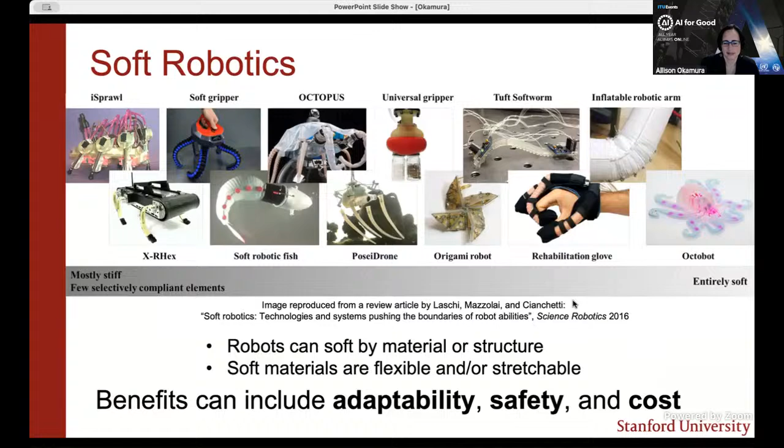And what can be, but not always true, is that soft robots can be less expensive than some traditional systems. They can be manufactured or fabricated, often without a fancy infrastructure, and this can actually make them more accessible to different communities. There's so many different types of soft robots. So I think a way to guide you through some possibilities in the field is to give a few examples from my own research lab. So I'm going to talk a little bit in the beginning about patient-specific medical robots, which was my foray into this field.

Spend a lot of time talking about robots that grow by tip eversion, also known as vine robots, and then end with some examples of soft wearable haptic devices to really spark your imagination about how these robots interact with the human body. Now, in many of these scenarios, the field of soft robotics is based on a long history of work in continuum robots.

So these are robots that aren't consisting of discrete joints and rigid links, but rather robots that have near infinite degrees of freedom. And a lot of these early robots were not really termed soft robots, but now they're recognized as such. And some of the challenges in making these soft robots function well is getting the right materials, having them be able to achieve these sort of continuum shapes, but still be able to apply strong forces to the environment. Because of course, a goal of robotics is to apply forces to the world in order to do good. And so if the robot is too soft, then it can't actually interact with the environment in a useful way.

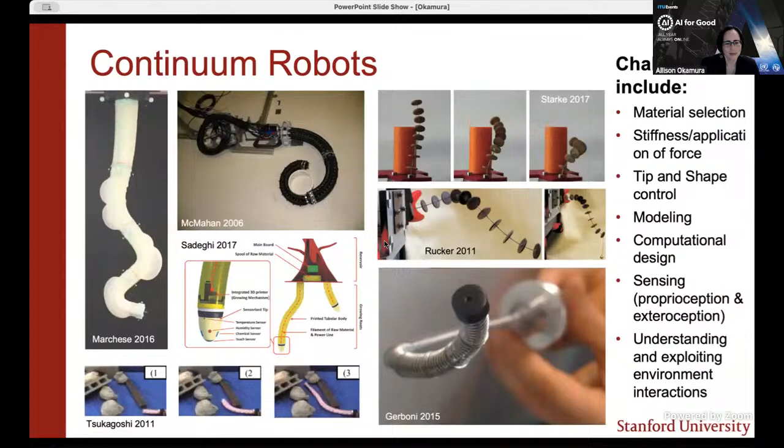We have to be able to control the tip of the robot as well as its overall body shape. And then there are some technical challenges related to how do you model them? How do you design them and optimize those designs? How do you integrate sensors? And overall, in order to do a task in the world, you have to understand how to exploit the environmental interactions. So these are examples of a number of concepts behind continuum robots.

And I think it's also important to note that many of these soft robots are based on biological inspiration. And since several of the systems that I'll describe to you today are built on the concept of growth, I thought I'd give some bio-inspired ideas that are related to growth. So pollen tubes, for example, grow over time, of course, relatively slowly. Nerve cells in animals also grow.

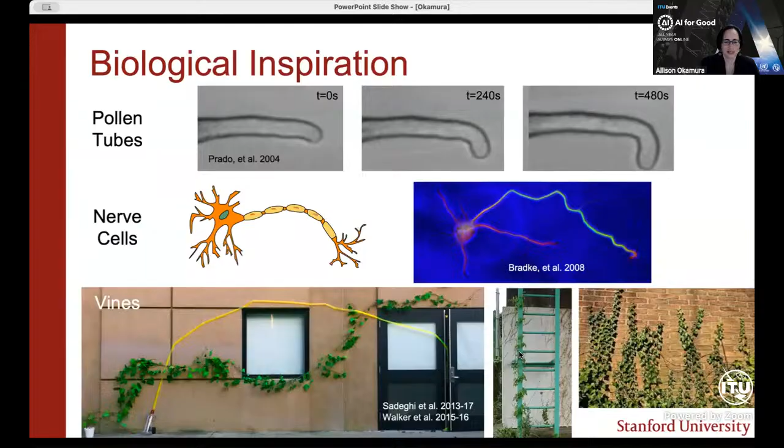And I mentioned one of our robots is called the vine robot, and that's inspired by the growth of vines, which can not only access places that are difficult for humans to go, but also stay in place in situ for long periods of time, which could have advantages. So biological inspiration for growth has driven a number of the projects I'll talk about.

So the first project I'd like to highlight is related to medical robotics. So when you think about robotics that help people, I think medical robotics often come first to mind. And the idea behind soft robots here is being able to create structures that can go into the body in the least invasive fashion possible.

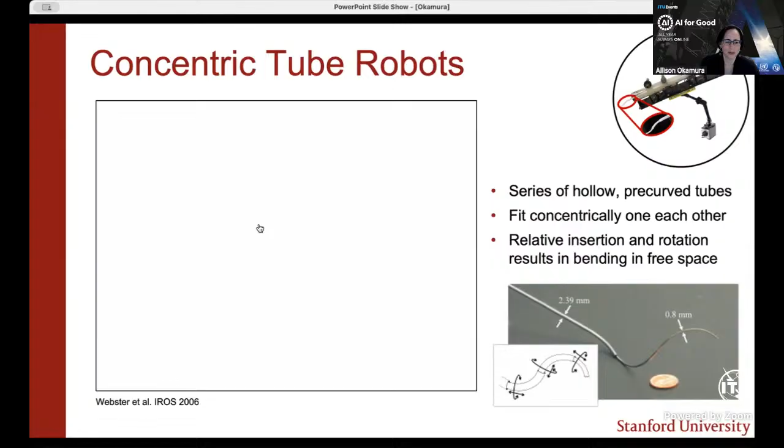So in this example, which is concentric tube robots, which I'd say we developed before I think the term soft robotics was really even thought of as a subfield, the idea is that we used semi-soft materials, in this case nitinol, which we use for its super elastic properties, and we make them into pre-shaped tubes. And those pre-shaped tubes, if you insert and spin them relative to each other, result in changing shapes and this sort of tentacle-like behavior.

And the reason why this is so useful for medical robotics is that unlike robots that have to have transmission through cables or even motors placed right at joints, all of the actuation, the motors can be outside the body, allowing for this very tiny entry into the body. You can see that the tip here is only 0.8 millimeters.

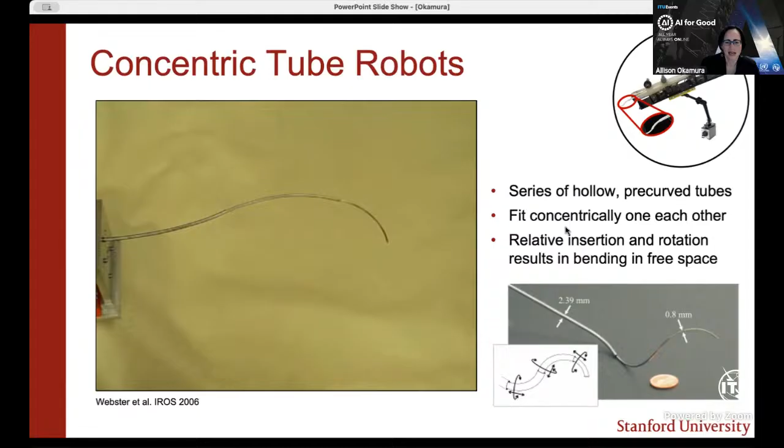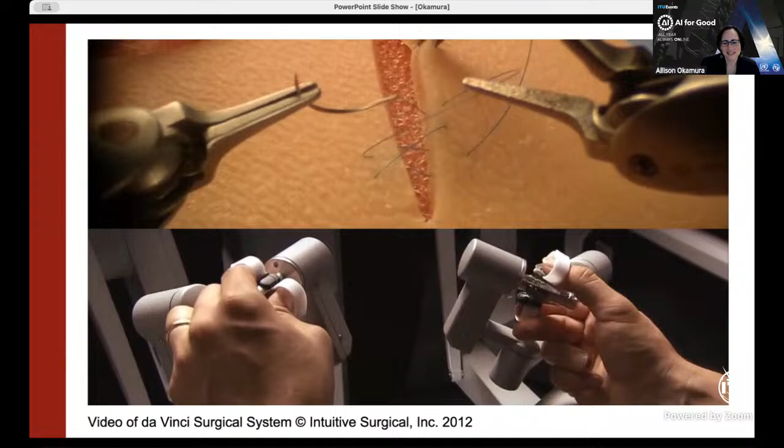Now, in contrast, let me give you an example of what is used currently in surgery today. And by the way, if you're the squeamish type, this is all artificial tissue. That is rubber and foam, not actual tissues. And this is a really amazing robot, the Da Vinci surgical system, which is a teleoperated surgical robot. And it does have lots of advantages.

You have a human operator, as shown at the bottom, manipulating these fancy joysticks. And then the robot on the patient side, which is shown at the top of the split screen, is following the movements of the surgeon's hands through a teleoperation control loop. Now, the patient side robot that you see in this case at the top of the split screen is magnified almost 10 times over what you see in the lower screen. So by teleoperating the surgical robot, it shrinks the surgeon down and makes them more effective.

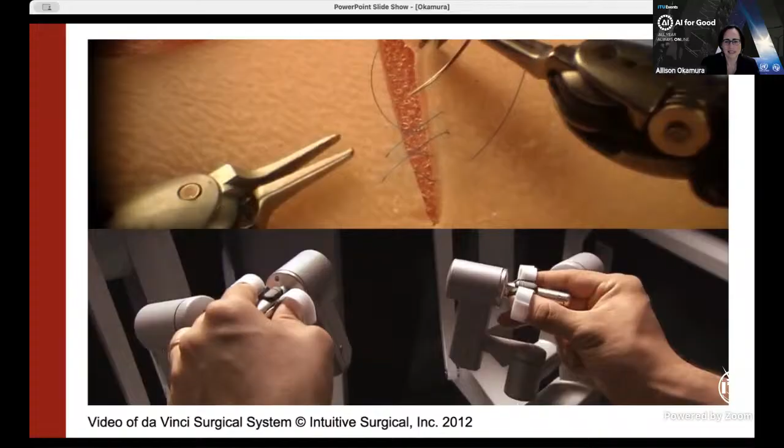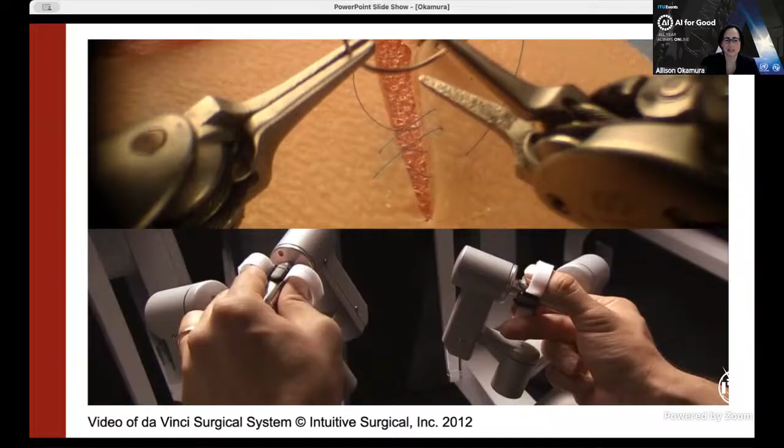However, one of the challenges is that these instruments are long and thin, and the ones that are mostly clinically available today are very rigid. And that means you can't actually access everywhere you would want to in the body. So the idea behind using these concentric tube robots is they can be skinnier, therefore have less invasive access. And instead of also being straight with a wrist at the tip, like you saw in the previous video, the whole robot shape can curve.

And this is some example work that was done by my former PhD student, Tania Morimoto, who is now on the faculty at UC San Diego. And it shows an example of how we can design patient-specific robots that are just right for a particular person. So we begin with CT scans of a particular patient, in this case a pediatric patient whose body is relatively small compared to an adult.

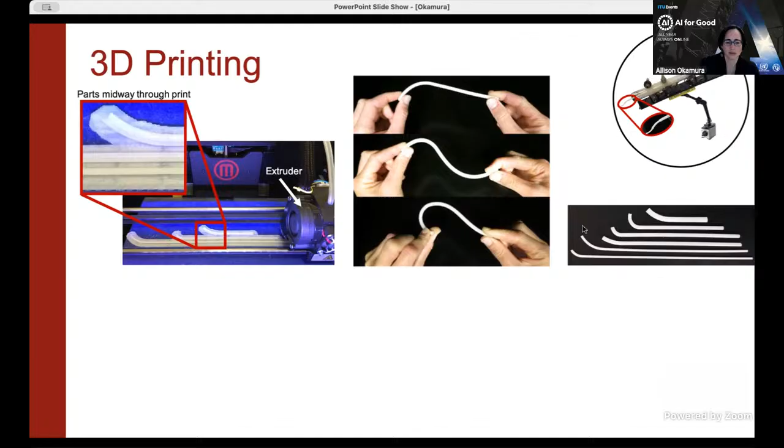So here's a very simple example of printing some relatively flexible tubes in order to create one of these concentric tube robots to go inside the human body. And you can also even make the drive mechanisms themselves more compact by integrating novel gear mechanisms and be able to create a lightweight system that you can place on another robot or even hold in the human hand in order to provide this minimally invasive access.

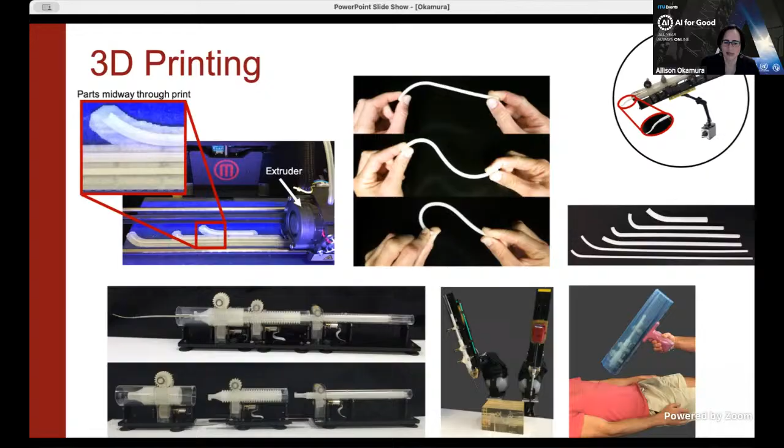So I mentioned before that these robots grow in a way, and they do. They telescope in and out, and that allows you to get this minimally invasive access, right? To get deep into the body without having to slide the whole instrument inside. We don't have new material come from the tip, and in this method, we use this telescoping method. But there is another way to grow, and that is of the form that we use in our Vine robots.

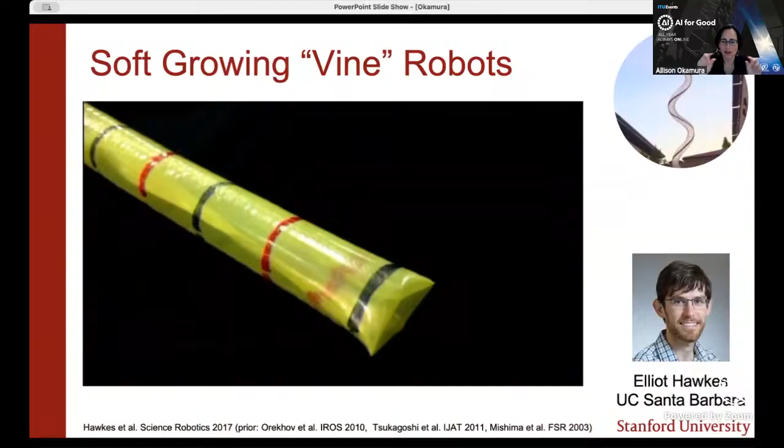The idea here with this very different type of robot, which still has this long, skinny form factor, is that we have a membrane. It could be fabric, it could be plastic, as shown here. And as you create it into a tube, you can also flip that tube inside such that you have more material on the inside. And then when you apply pressure to it, the tip turns inside out, also known as eversion, and that allows it to grow.

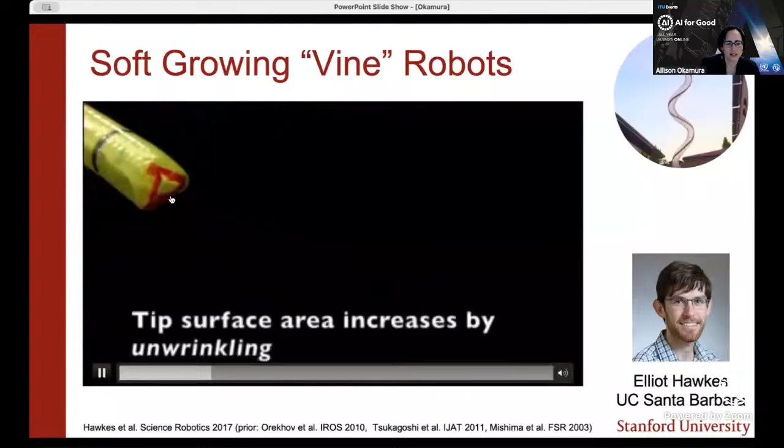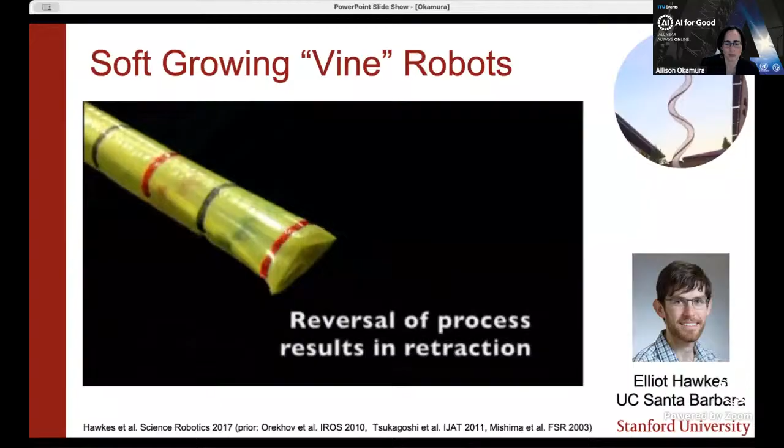And so this video here just shows a close-up of what it looks like at the tip, showing that new material comes from the tip and turns inside out, unwrinkling and causing growth. And then that process can be reversed in order to retract the robot as well. And a lot of the work I mentioned here was spearheaded by Elliot Hawkes, former postdoc who's now at UC Santa Barbara. And I'm going to spend the majority of this talk discussing these Vine robots because there are so many interesting applications for these robots that are relevant to UN Sustainable Goals.

So let's look at what this type of robot can do and what is its basic structure. So one of the great things about this type of system is that when you use pneumatics, you can use air, which is a readily accessible filler material, in order to make the robot extremely long.

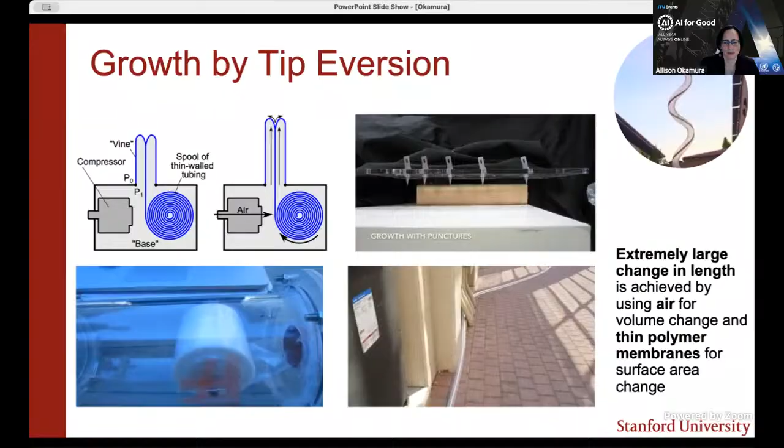And so in this case, we have a spool of simply LDPE tubing, so that's low density polyethylene tubing, similar to the kind your materials are packaged in when you purchase something, and that makes a very compact base. And then when you take that tube out and you flip it inside out and you fix it, you have this closed air in this light gray area here, and then you can have a compressor or other type of pump and apply air inside, and then the air itself pushes the robot to extend its length and to evert.

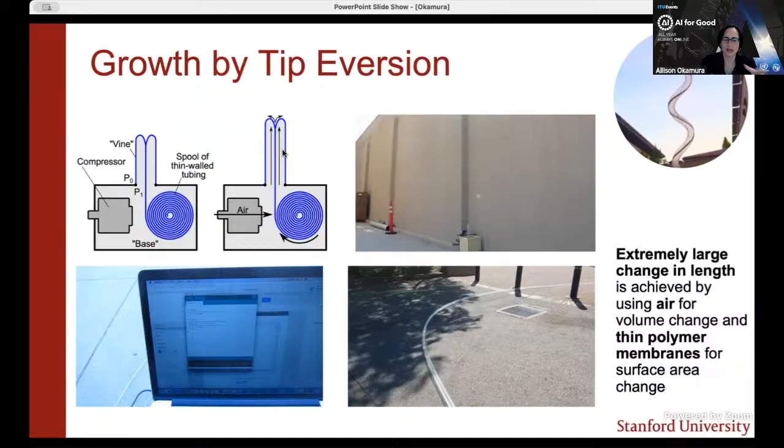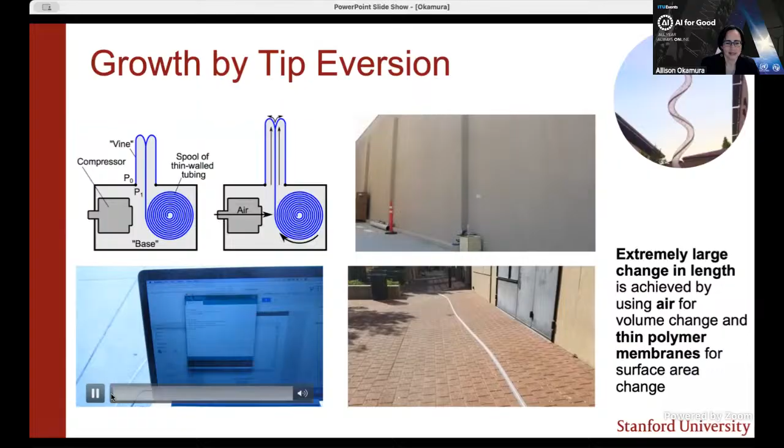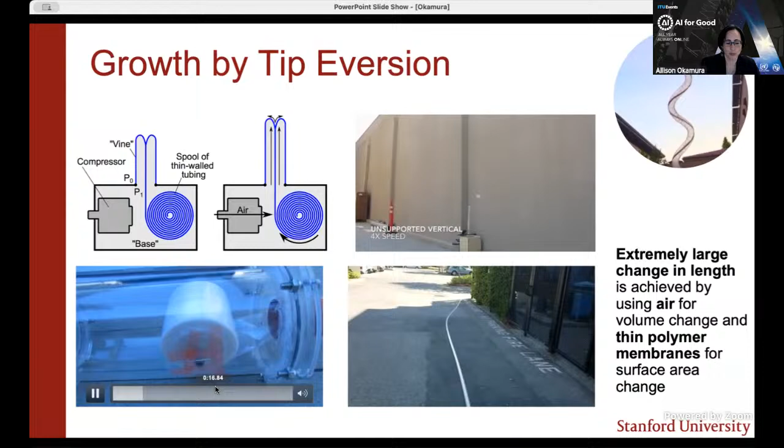And it's important here that the material be flexible, that is, it can bend, but it can't be stretchable, because if it was too stretchable, then it would expand in diameter rather than extending its length and everting. And so in these examples here, I'm just going to go back so I can restart the videos. We see an example of a relatively small spool of tube you can see on the lower left. And when that tube is expanded, it grows about the length of a football field.

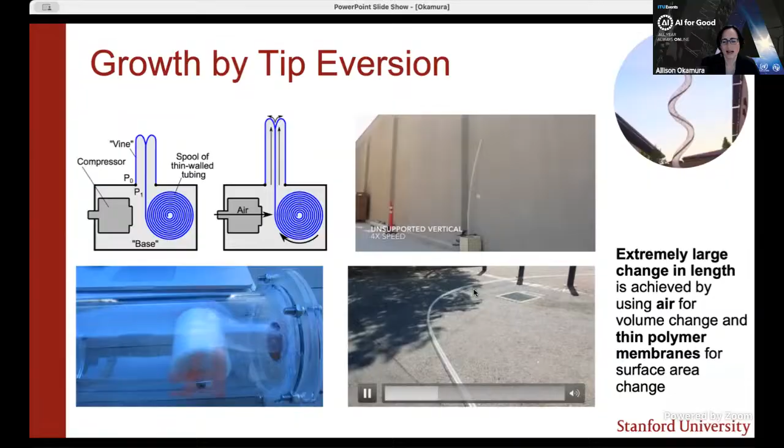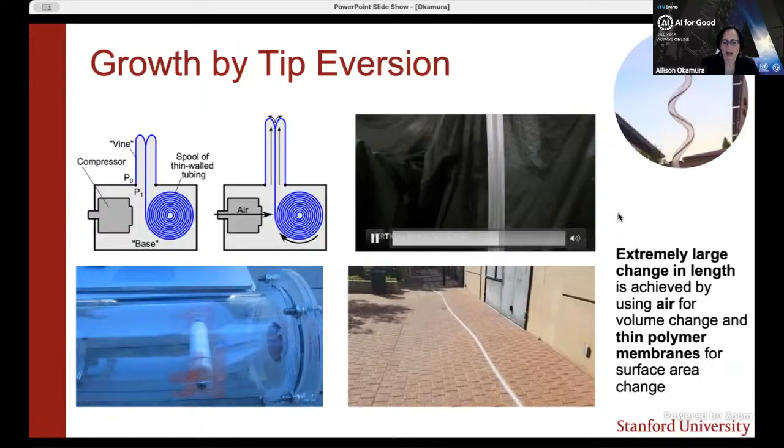And in this case, we're not actually actively steering it. We just grew it and it sort of bounced off of its environment. And you can see you can also grow against gravity if desired. So you can get this very large change in length and explore in locations where you couldn't do it otherwise. But if you're just growing in length, it's hard to say, is that exactly a robot? What is your definition of robot?

For most people, a robot would be a mechanism that can also autonomously respond based on sensing and reaction to something that's happening in the environment. So we would like the robot to actually steer and change its direction based on things it senses in the environment. And I'll play this to restart the videos. So on the upper left is an entirely autonomous Vine robot that is using a camera that's being pushed forward at the tip in order to seek out light and change its shape in order to achieve a particular configuration.

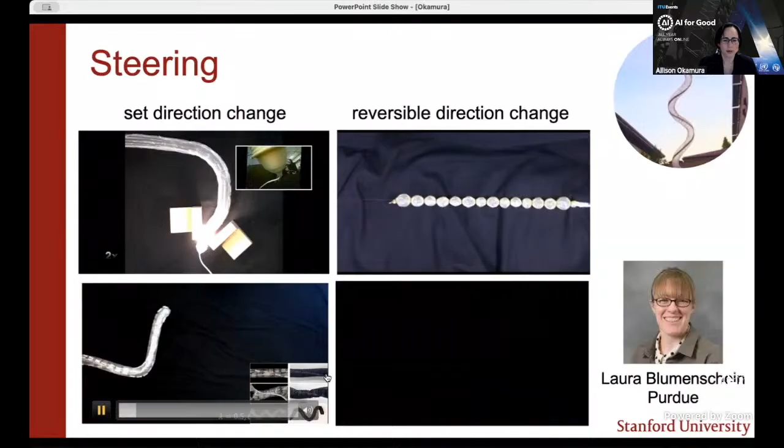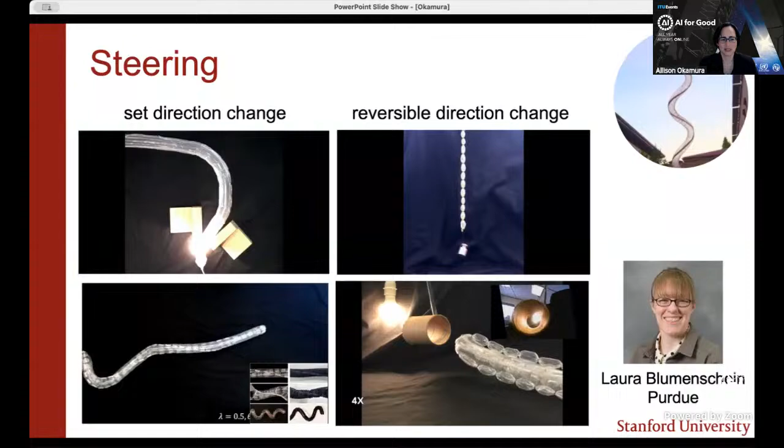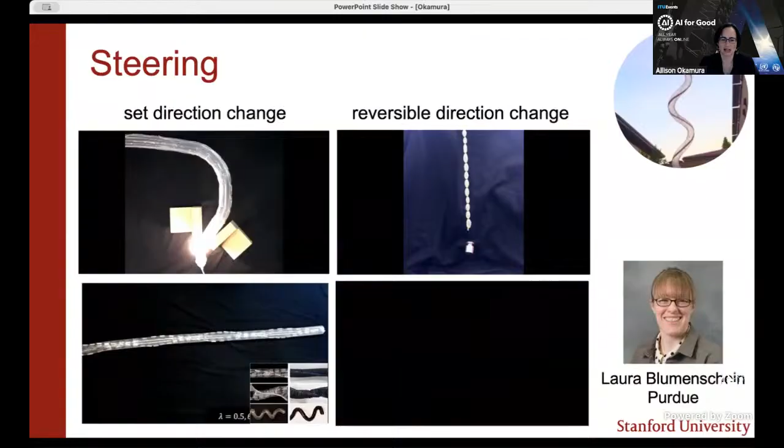And then some of the other videos here just show other ways in which you can change the shape by pulling on tendons or creating pneumatic tendons. And an important note is that you might have to make a decision about designing a robot that's relatively compact, that has simple actuation such that it can achieve just a particular set of discrete shapes, versus this reversible direction change shown in the videos on the right, where it can say turn left, turn right, and then decide which direction to grow in. So steering is very important to make this eversion principle into something that actually resembles an autonomous robotic activity.

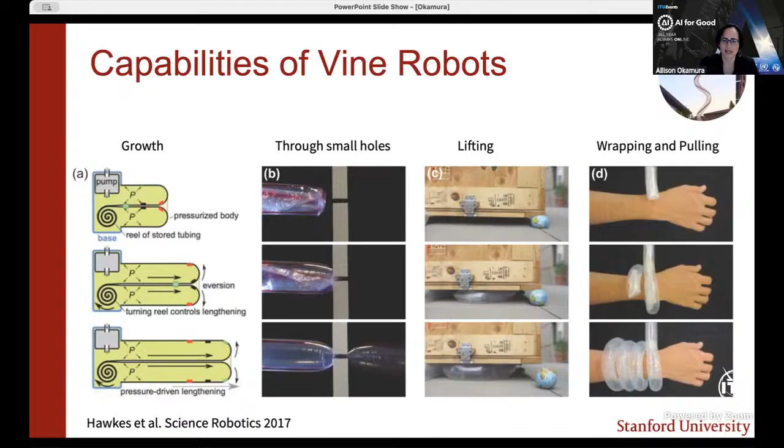So these properties, the growth plus the steering, allows you to do some pretty cool things. You can go through small holes, you can grow under objects in very small areas and then expand radially in order to lift a heavy weight, as shown here. And you can also wrap around things in the environment and even pull on them. And so you can think of it sort of like a very smart rope. It's not exactly a snake because a snake has to push off of the environment in order to move forward. But in this case, the robot is moved forward by internal propulsion, so it actually doesn't rely on contact with the environment in order to do its task.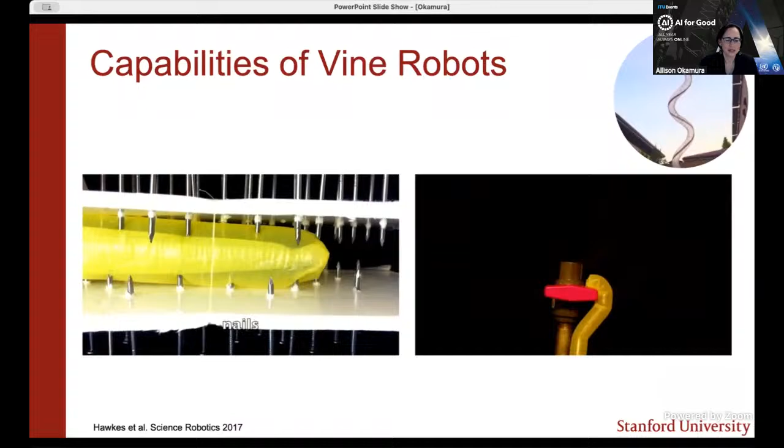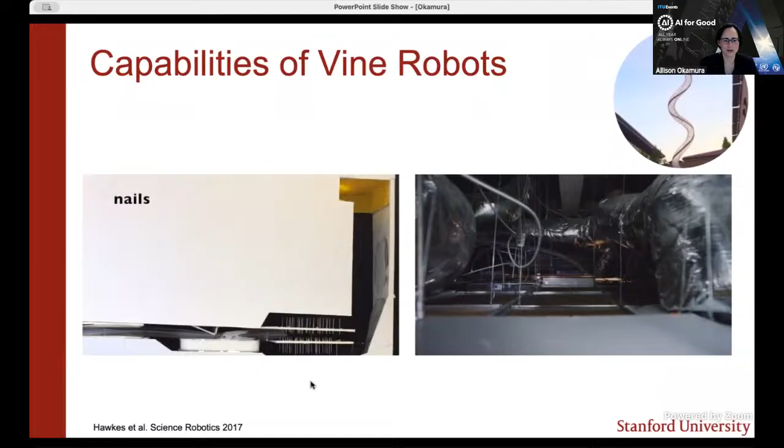So I'll show a few more videos here of capabilities of Vine robots, and then we'll get into some various applications in different scenarios in which we've used these, and hopefully this will spark your imagination about what soft robots can do for humanity. So on the left, we have some close-ups of going through some difficult surfaces, including a bath of white glue, going through nails that actually poke into it a little bit, to going through sticky fly paper, and then delivering a sensor through the middle of its body.

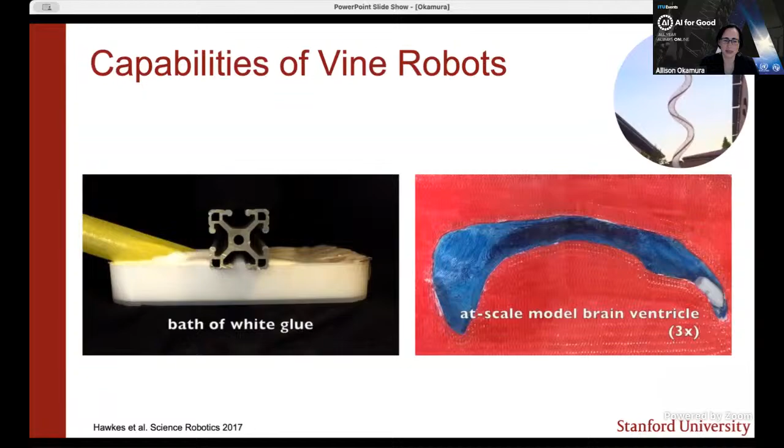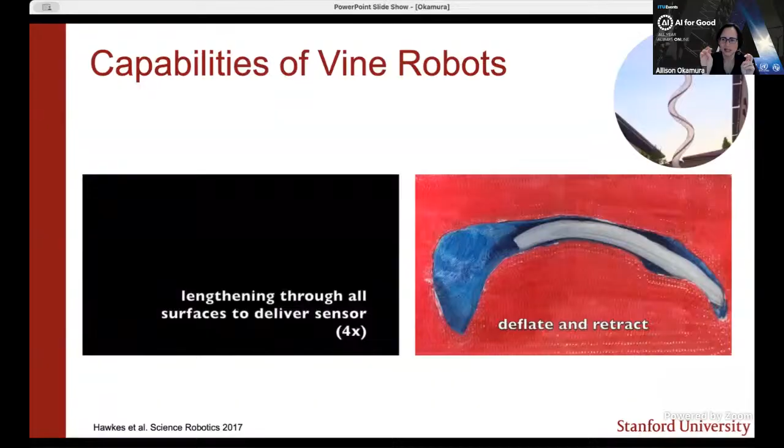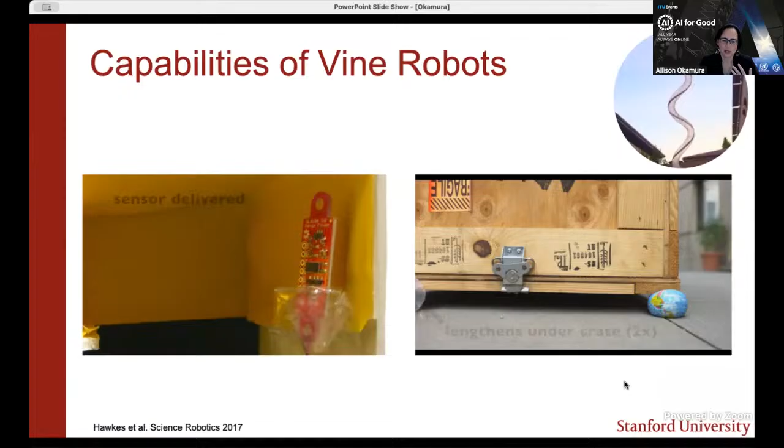And this system, which I'll play again on the left, is doing things that it would be almost impossible to imagine any kind of traditional robot being able to do. And because new material is coming from the inside and flipping inside out at the tip, it means that you always have fresh material coming through the tip and you're not dragging any detritus from the environment through it. And on the right, we show concepts that are more related to creating useful structures. This is the example of growing under a crate and then being able to act as a pneumatic jack.

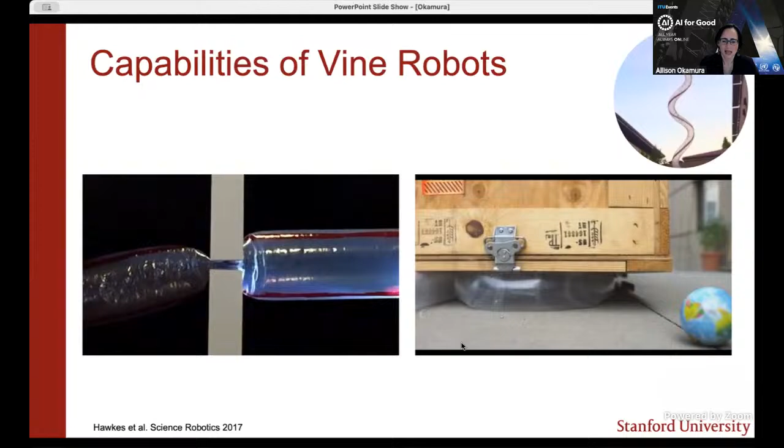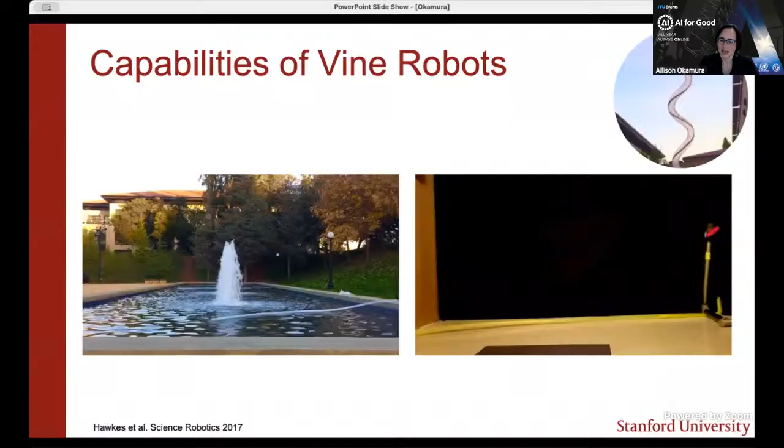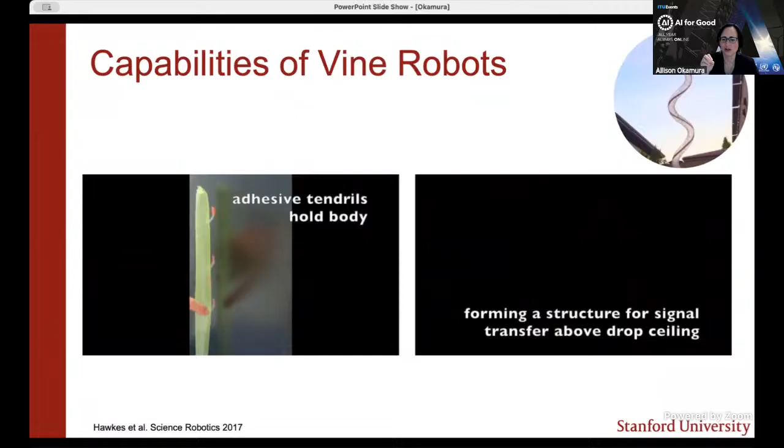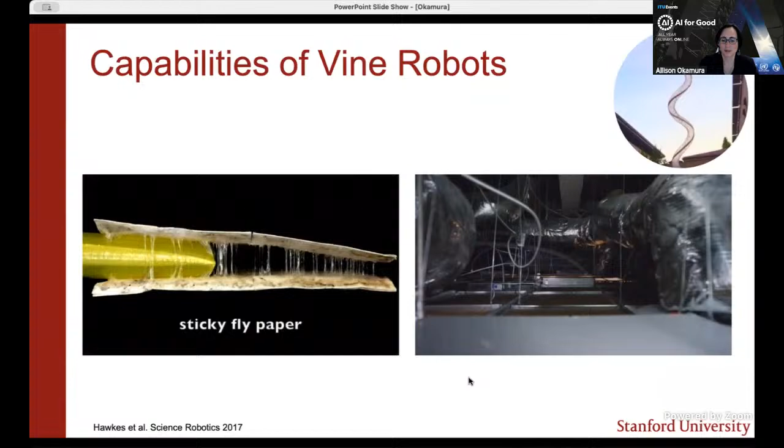I'm going to go back to the beginning again so that we can look at how a robot like this can go under a door and reach a valve and then actually hook onto it, and then you'll see it pull to effectively turn the valve. So it has very limited manipulation capabilities, but if you use the structure in a smart way, you can preform the robot and also pull on it in order to get access and perform some unexpected tasks in scenarios that would keep humans safe and maybe away from a dangerous situation.

Let me just also, for the rest of this section of the talk, really highlight robots being used in some interesting scenarios. And the first one I'm going to show here was spearheaded by a former PhD student, Margaret Coad, who's on the faculty at Notre Dame. And she took our Vine robot, a special version that she designed, to Peru in order to use it at an archaeological site with a faculty member who was studying the history of Chavín in this region of Peru.

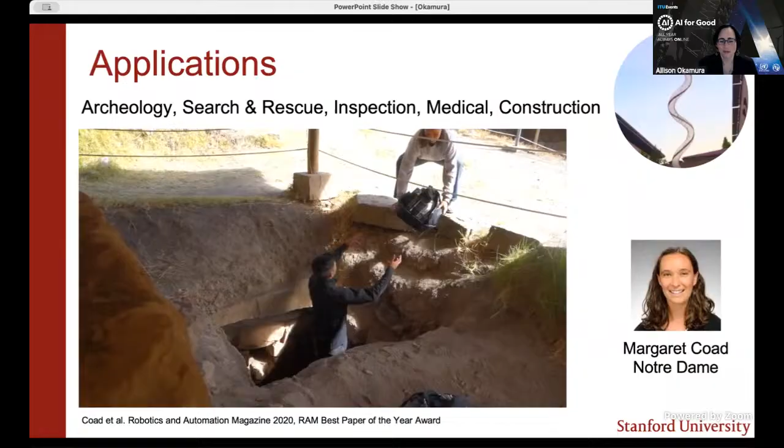So there's Professor Coad with her Vine robot, which, unlike many robots, has really been designed to go outdoors, to work in rough environments, and deliver camera and vision into places where you can't normally see. And these are environments where it would be quite dangerous for a human to enter. And so Margaret was able to see things that wouldn't be able to be viewed in any other way. So archaeology is a really interesting example, and you can start to imagine the robot going into all sorts of difficult places that humans couldn't go otherwise.

And one example that we've done in this vein has been working with conservation biologists and ecologists at Stanford who are interested in studying endangered animals. And in particular, at Stanford, we have a creature called the California tiger salamander. And this is a very cute animal that lives in the burrows that have been abandoned by California ground squirrels, actually. But they are endangered, and depending on the weather and the climate, they can also be a kind of hallmark of how we're doing in terms of protecting our environment.

And so this picture shows some of my graduate students actually putting one of these Vine robots into a tiger salamander burrow, going underground in order to inspect and examine these environments. And because the burrows are tortuous in nature and have these complex paths, putting a GoPro on the end of a stick is not the right way to get in there. And there really isn't any other way to non-destructively monitor these environments.

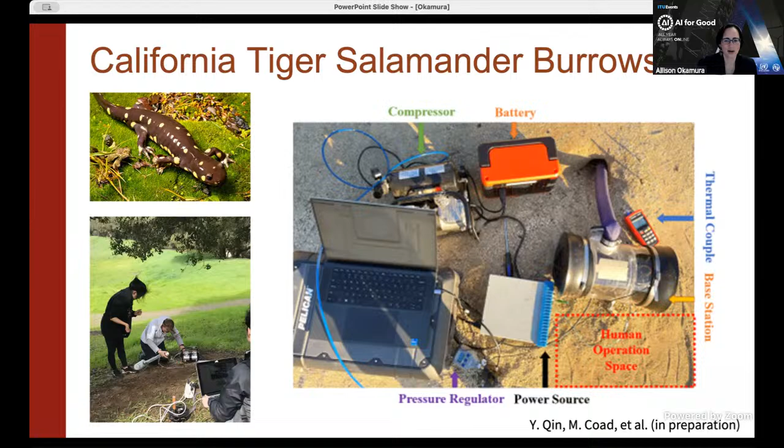So it's interesting, although that project began with an interest in studying the burrows of tiger salamanders, we realized that pipe inspection in general is a really critical task. Throughout the world, we have infrastructure consisting of pipes which provide water, take away sewage and waste, move chemicals around for processing. There's both civil, public, and commercial infrastructure that consists of pipes that in many cases can be very difficult to inspect.

And so we've been working hard to make soft robots that are specifically designed to go inside pipes. Often they need very little steering because the pipe itself constrains the robot, but sometimes you have cases where you have a T-junction or you might get stuck otherwise, and so you can have just a tip mount that steers rather than having to steer the whole body of the robot. And this is a project led by my PhD student, Yimeng Qin, and the idea is that we would like to have better, more sustainable infrastructure by providing this non-invasive or minimally invasive access into the pipes, similar to the way in which other types of robots are minimally invasive devices that can go into the human body.

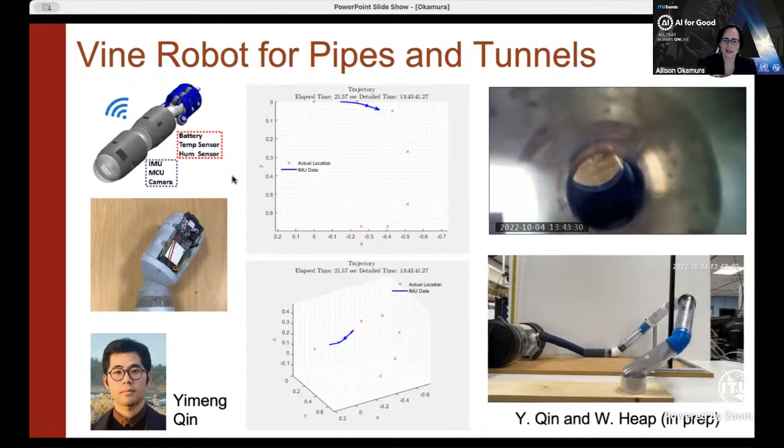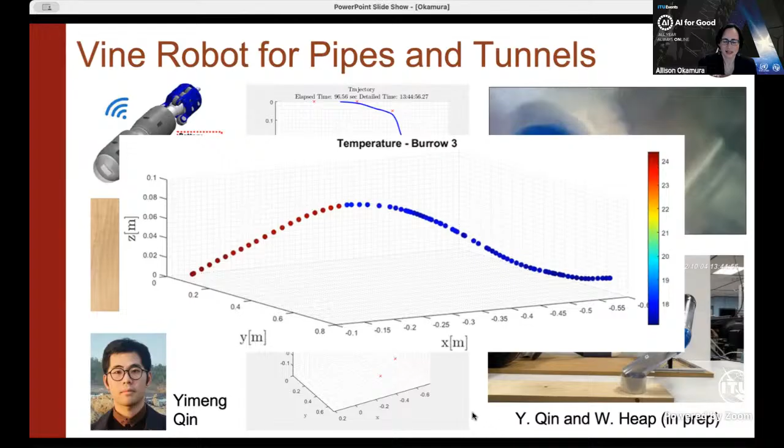And we've even used this type of robot in the tiger salamander burrow. And so one example is as we map the space of a burrow and follow the line, we can do things like measure the temperature here in Celsius as we move around the burrow environment. So it works for pipes that humans make as well as tunnels that animals make. So let's continue along this vein about the importance of being able to do minimally invasive inspection, right? How do we get sensors into locations where you want to keep humans safe and yet still get eyes on what's going on?

And one potential application is nuclear facilities, both the types of pipes that I just talked about, but also just in scenarios that might be in open air in 3D that might have, for example, containers of nuclear material that need to be counted and tracked.

And so we envision that we can do inspections in hazardous environments by having vine robots that have more three-dimensional capabilities and more steerability. So instead of just the whole thing curving, but that you could curve left and curve right and come up with these snake-like shapes.

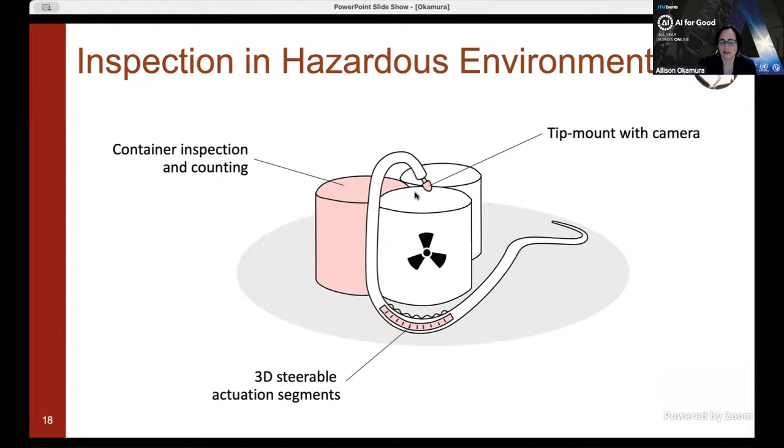So in order to do this, we need 3D steerable segments where we can actuate. We need tip mounts with cameras and eventually manipulators. And we need to be able to observe and track things in the environment.

And much of the work that we had done until a few years ago, we focused on two-dimensional steering, vine robots that went around the ground or maybe very little bit off of the ground. And we've been able to make those very long. But there are a lot of design limitations in doing this. We didn't have true 3D steering. These materials also had limited lifetime due to leakage, and they're very difficult to fabricate.

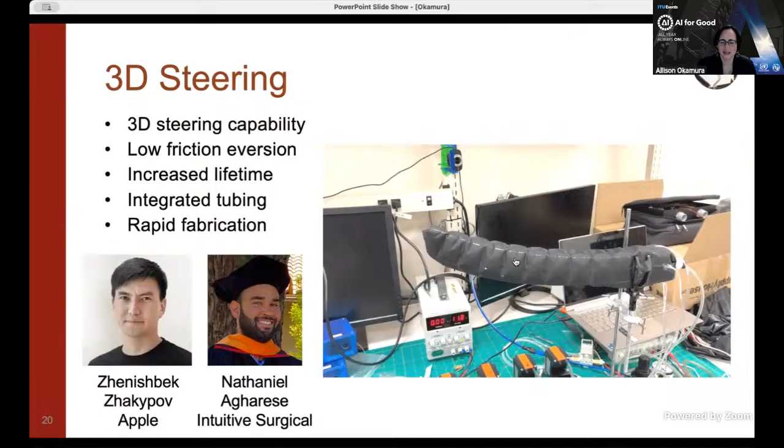So we've been focusing recently on three-dimensional steering, and we've come up with a new fabrication method that's also been observed by other research groups around the world, that we can get 3D steering capability and have more efficient fabrication using a technique that I'll highlight in the coming slides. And this work was led by my former postdoc, Zhenishbek Zhakypov, and my former PhD student, Nathaniel Agharese.

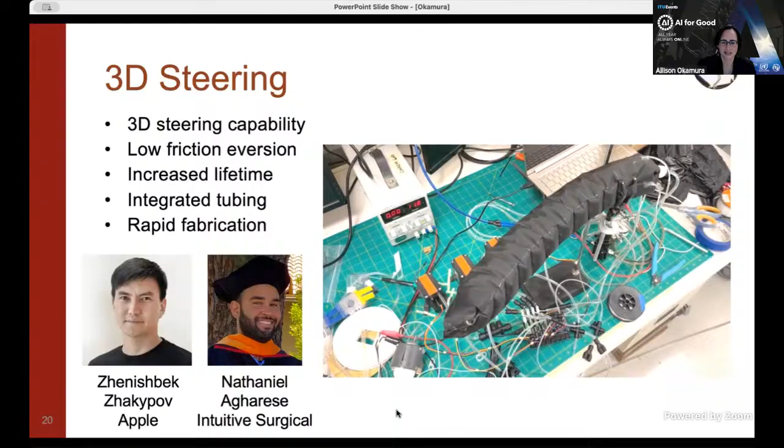So to give you a sense of what it's like to make these vine robots, I showed you a lot of these soft robots, but not really described how you fabricate them. I think this is a nice example of a fabrication technique that really builds on sewing and other methods that already exist in the world. And this is one of the reasons that it could potentially be lower cost to fabricate compared to traditional robots.

So we have this unibody design with segments that are embedded into the main body of the robot. And we do this by taking a fabric material, which has a thermoplastic urethane coating on it. And we create basically a sandwich of two of these materials together, and then we seal it along all of the lines that are shown here. So there are two layers, one right on top of each other, and they're sealed together.

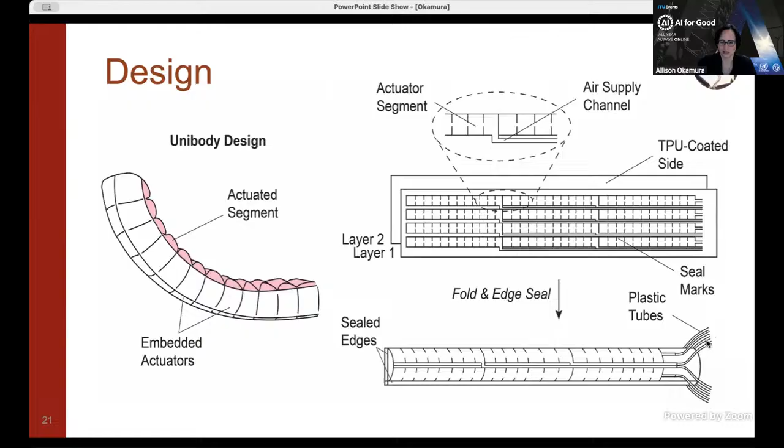We create all of these seal lines, which are shown in all the black lines here. And then we fold them and create a seal edge, and then we add some plastic tubing in order to drive it. And to further show some examples of how this is created, we use a Cricut system in order to basically plot onto it some lines that show where it needs to be sealed. And then the welding actually happens using an ultrasonic welding machine that looks a lot like a sewing machine.

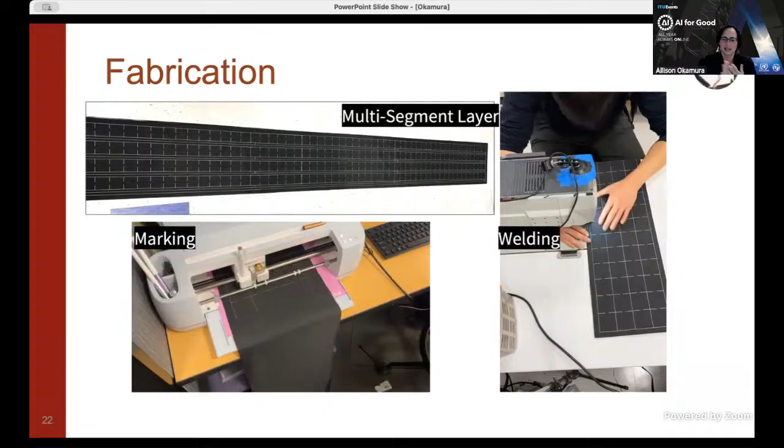And these kinds of processes could definitely be automated to be done at scale, but here's an example of my former postdoc Zenit doing this by hand, and you can see it's a lot like sewing, except you're actually using an ultrasonic welder to attach the materials together.

So what do you get when you've finished creating a system like this? You have a pneumatic control system with a motorized spool, an air supply, embedded tubing, and then steering actuators that let it move in 3D. And while these systems have the potential to operate autonomously, there are a lot of scenarios where you want to have at least a human in the loop for supervision.

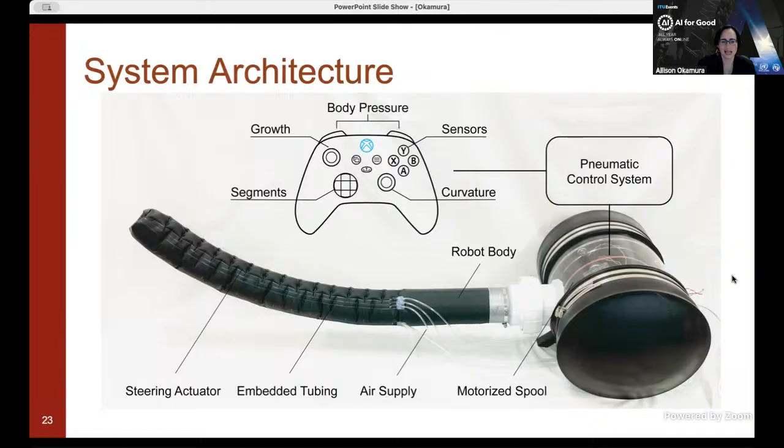So in this case, we had a human in the loop using a game controller in order to steer the robot. So on the left, we see the robot just doing more 2D actions, but let's focus on the video on the right, where we show that the robot can climb up some walls, and you can see actually the video feed in the upper right of the camera.

You can see it going up close to inspect the ceiling tiles in my lab, and then turning downwards a little bit in order to see some pile of boxes here in the upper left. In a second. So now it's steering down to look into locations where a person can't easily see, and then it can even spy on some of our design notes on the whiteboard here.

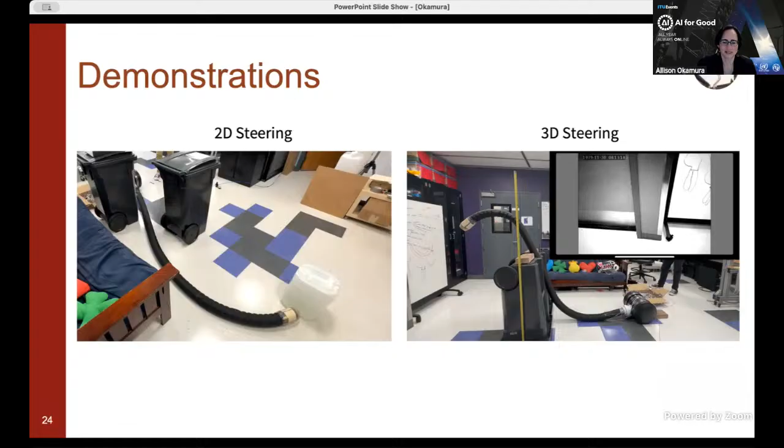So the idea is that these robots can be really used as 3D inspection at a much larger scale than borescopes and some other inspection technologies. And we've even put Vine robots like this many dozens of feet into pipes and place them in environments where there's just no other technology to go. So those were applications that let us become more 3D.

But one of the exciting things is having different types of robots paired together to get to even more difficult to reach places. So one of the things that we'd like to do is make the simplest possible robot that can be flown around by a drone. And to do that, we'd like to minimize the amount of actuation on the body of the robot to make it as lightweight as possible.

So my student Rianna Jitosho, who just graduated and is about to start work at Intuitive Surgical, a medical robotics company that I mentioned earlier that made the Da Vinci robot, she did a project which exploited the dynamics of these Vine robots. So you can have relatively lightweight actuators and use a combination of the movement of a drone and reinforcement learning in order to get the robot to do a particular task.

So this shows some of Rianna's early work, where instead of yet putting this Vine robot on a drone, she just showed with a simple sliding actuator that a Vine robot hanging down could be used to reach different targets and be used with reinforcement learning.

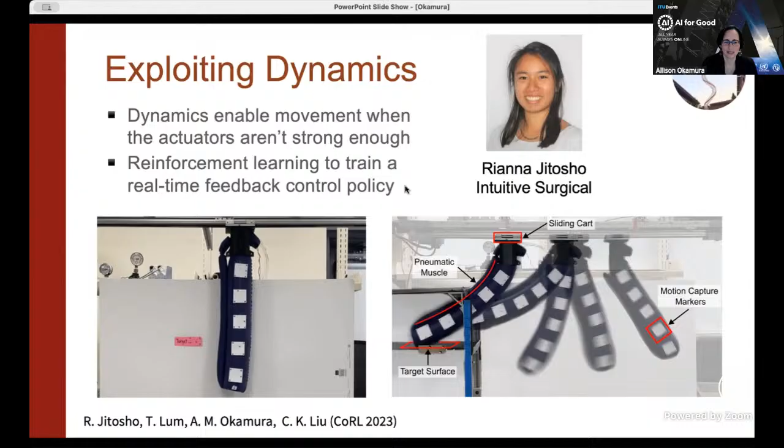And what our long-term goal is here is to do inspection and recording of information in difficult to reach spaces. Right? So drones can get close to environments that other types of robots cannot, but a drone can't fly into a very small space, and sometimes with a delicate environment, you don't even want to get the drone that close because it can disrupt things. So the idea behind this graphic is that you have a vine that's growing out of a drone, and that vine could be used to snake into an otherwise inaccessible tunnel or pipe in order to do inspection.

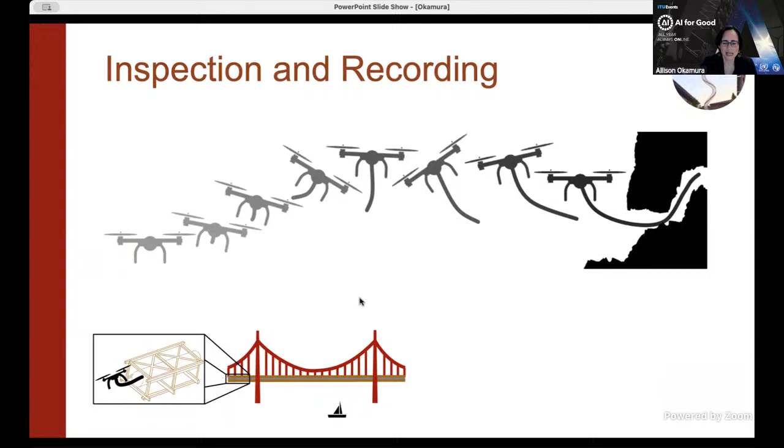And potential applications include inspection under a bridge, also deploying sensors into the environment, and again, doing this in a way where there's no other type of robot that exists that could actually get in there in order to delicately, say, hang sensors onto a branch for environmental monitoring.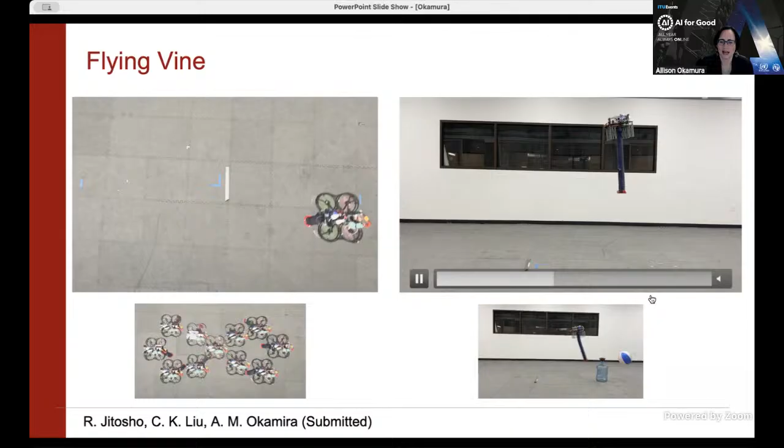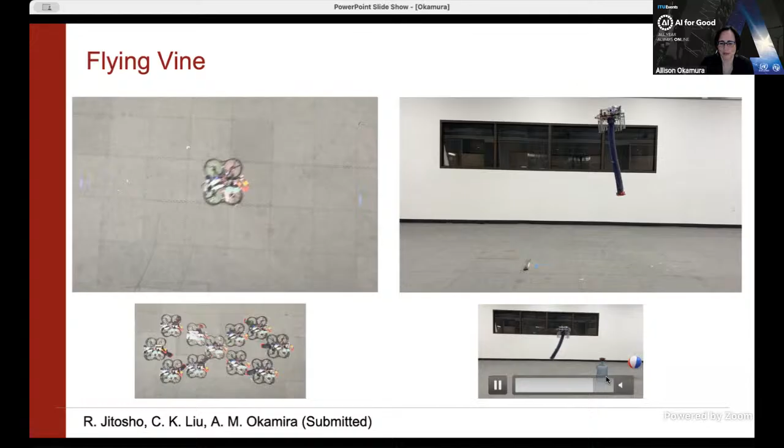you can not only control its position by swinging and adding actuators that curve, but you can exploit the dynamics by having the Vine robot grow and having the drone control system understand how the length of the robot is affecting the dynamics, so that you can do tasks like precisely touch something in the virtual environment. So that was our flying Vine.

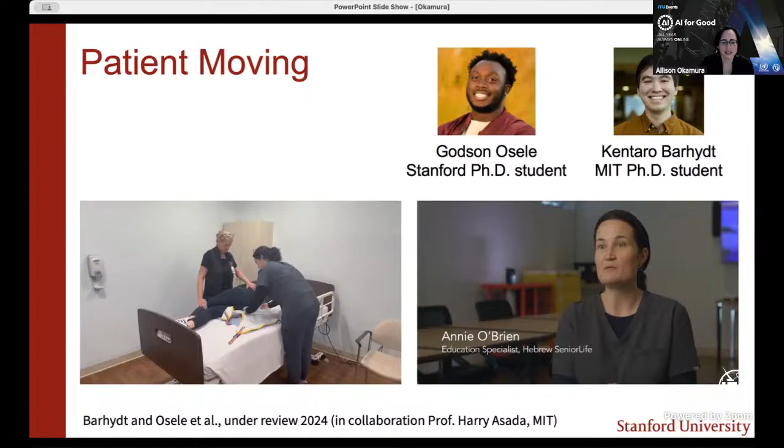Now kind of moving back to terrestrial and things that directly interact with humans, let's talk for a minute about patient moving, which is another really critical task. As we have a growing elderly population, it's a challenge for nurses in homes, as well as for family members that are caregivers. It's very difficult to move an older adult or an injured person from one place to another. So these soft-growing robots can be a way of interacting with the human body.

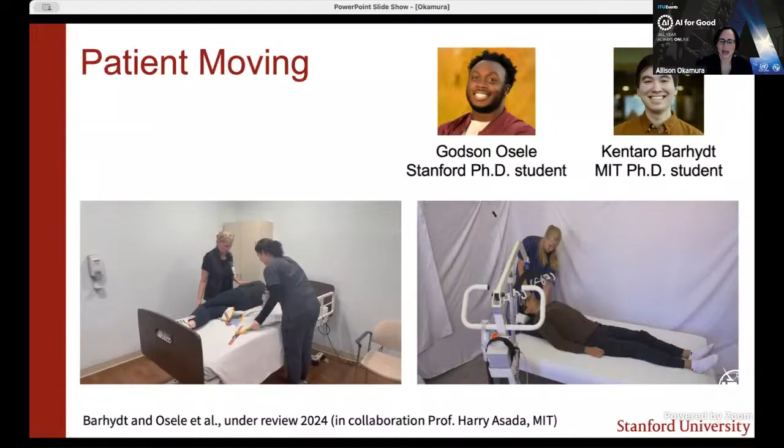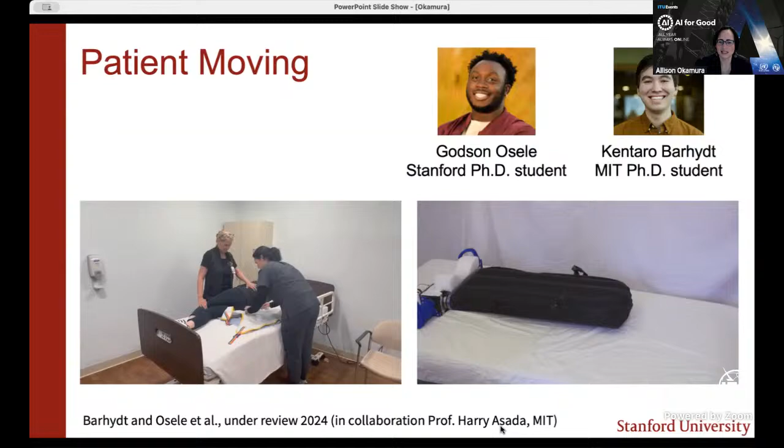And what we have on the right here are some videos of a soft-growing robot that is now in more of a flat form factor, such that it grows under a person, and then that person can be lifted up using what's known as a Hoyer lift, based on having this sheet that grew under them so that you don't have to turn the patient around. And this is work done in collaboration with Harry Asada's group at MIT, led by PhD students Godson Osele and Kentaro Barhydt.

So let's end this talk switching away from these Vine robots and towards the human connections, the physical connections between people. And I'm going to use this to highlight haptic or touch feedback devices that are based on soft robots. And these devices could be used to create human-human communications for people who are remote, communications between humans and autonomous agents like a directional system, as well as humans and robots in the environment.

And when you think about devices that touch or can be touched by humans, we would like them to take on many different shapes and be able to convey useful information. And some of our first soft robots were like the one shown here for haptics, where the human would reach out and touch this object as if it was a digital clay, and we successfully used this for tasks like medical simulation and practice. But now we're very interested in wearable robots.

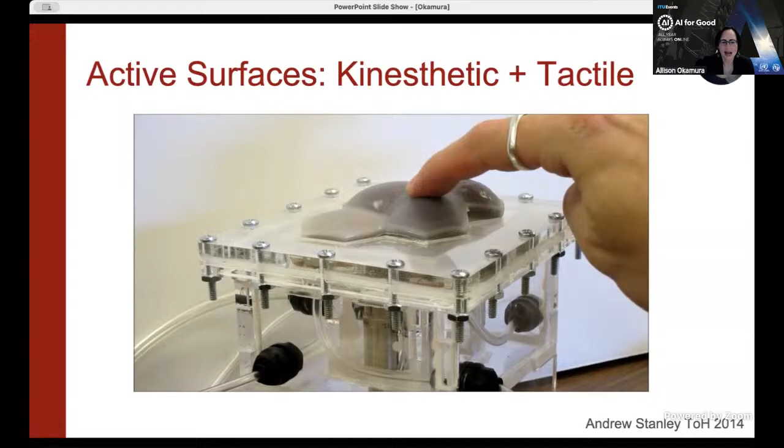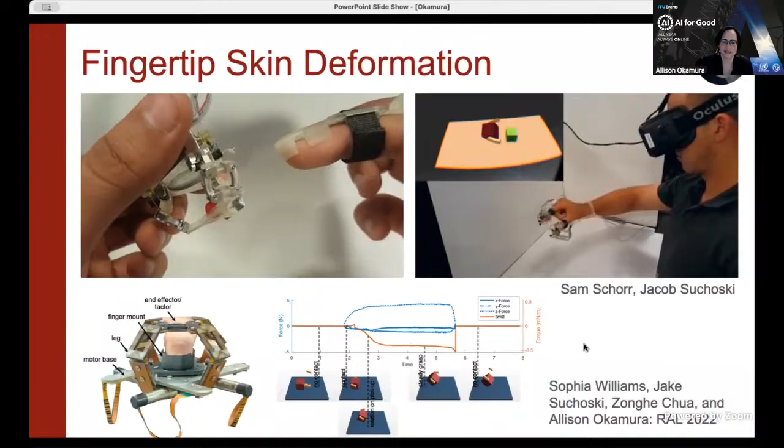And our first devices weren't exactly soft, but they provided really compelling interactions with virtual environments that could be used for training, as well as for remote communication and design. But these robots were very expensive and they were hard in the sense that they weren't deformable.

And so we've been designing fully 3D printed haptic devices out of semi-soft materials, which utilize pneumatics, allowing the pumps and such to be off board and creating a much smaller interface with the human body, and one that is very effective and actually even much more attractive, I think, from a visual point of view.

So let's talk about getting these, I'm going to skip over some details here, getting these robots now beyond the fingertips to other parts of the body. We, for years and years, have been focusing on haptic devices for the fingertips, but we'd like to have them mounted in other places to leave the hands free for other tasks.

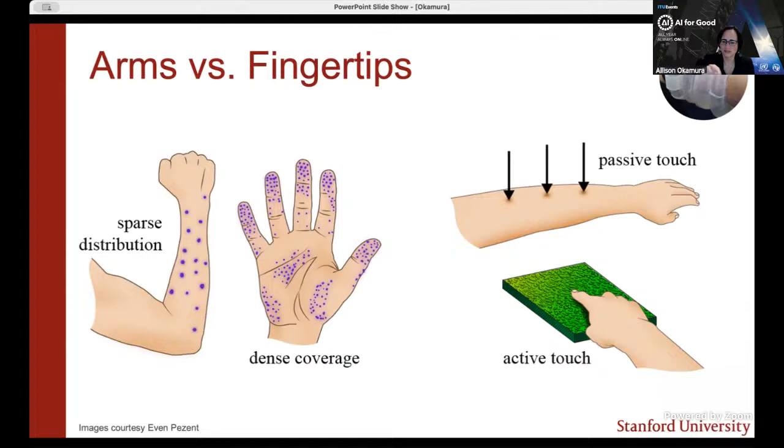But the challenge is the sensors that are embedded in our skin are much more dense in the fingertips than other parts of the body. And also, we can use active touch with our fingers to explore the environment, whereas in other parts of the body, we need to receive passive touch.

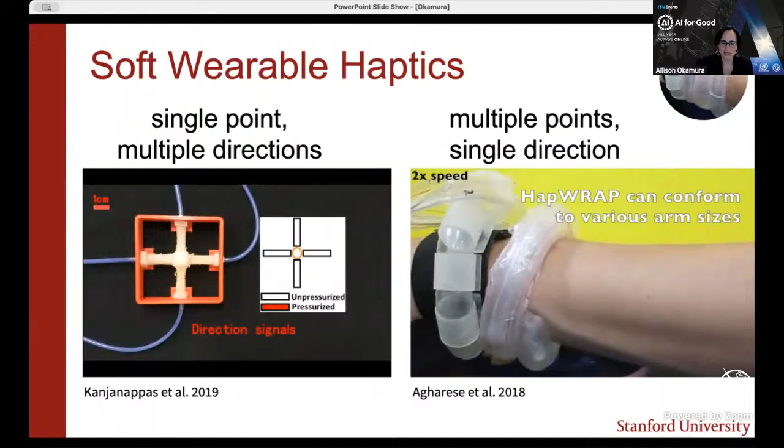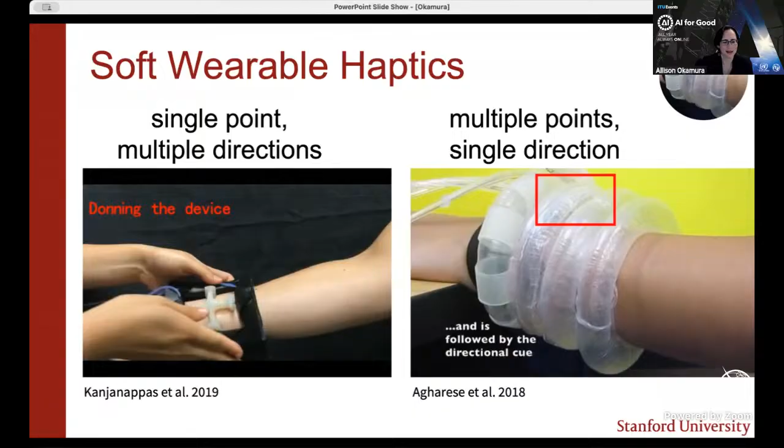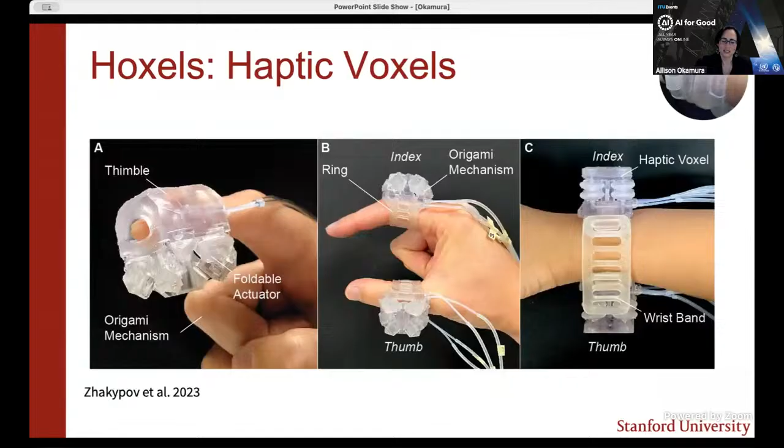So I'll start by saying that we designed some various wearable haptic devices for the arm that were interesting, but ultimately didn't seem to have a lot of practical application. It really took us a while to get to devices that would be much smaller form factor, because the things I'm showing here really aren't going to be something that people will want to wear on their arms every day. So we built on this finger device concept that I showed earlier to put haptic devices in other locations.

But the challenge is that if you go out and you touch a virtual object but you get the feedback in a different place, we needed to know, how do you do that mapping? How do you take interactions from the fingertip and put them in other parts of the body? So my PhD student, Jasmine Palmer, did a number of really compelling experiments that showed us what kind of mappings work best. And so this way now, a user can interact with virtual objects, get feedback in other locations of the body, and we can understand how to best do those mappings.

I'm going to end with a last example of wearable haptic devices for social touch. So human-machine interaction, or I should say human-human interaction by touch, is a critical part of our mental health and growth. And so when we are apart, or for example in the COVID era, being able to communicate through touch is really critical. And we showed with some traditional motors that you could actually demonstrate very accurately, as people can demonstrate to each other, how someone feels based on touch interactions.

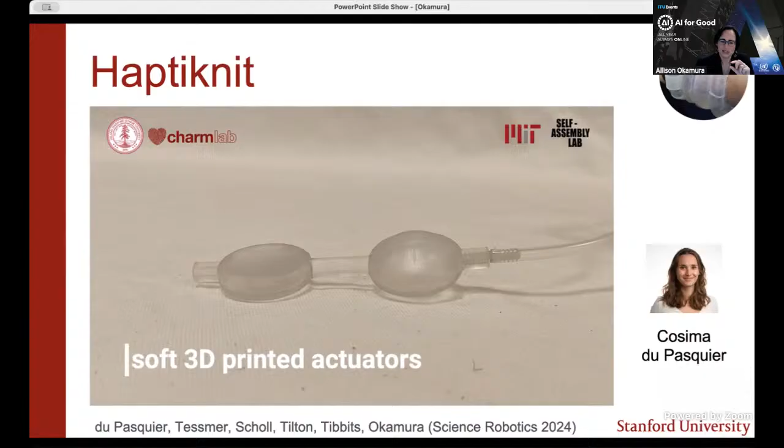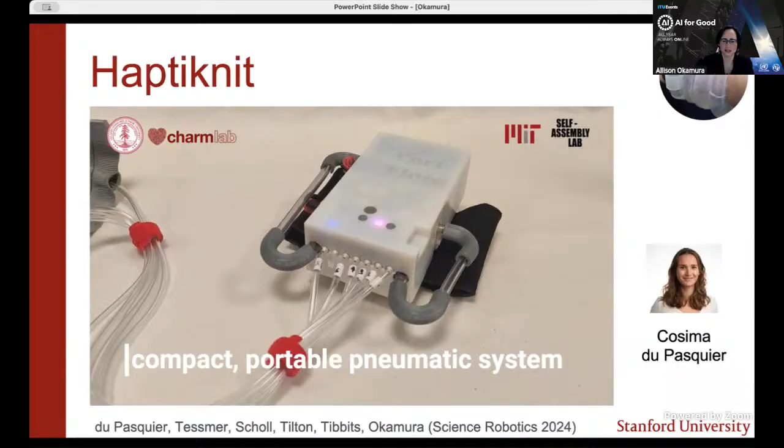So I'm going to end by showing how we're doing this now with a relatively compact wearable sleeve called Haptiknit, which uses soft actuators that are embedded in knitted material. And a key point is the knit sleeve has to be specially designed and optimized in order to provide a good backing off of which to apply forces to the human body. So you have this challenge where we need to display relatively high forces due to the not so dense tactile sensing in the human skin here, but we also want the overall device to be wearable and comfortable. And that's something we've been able to achieve with knit materials.

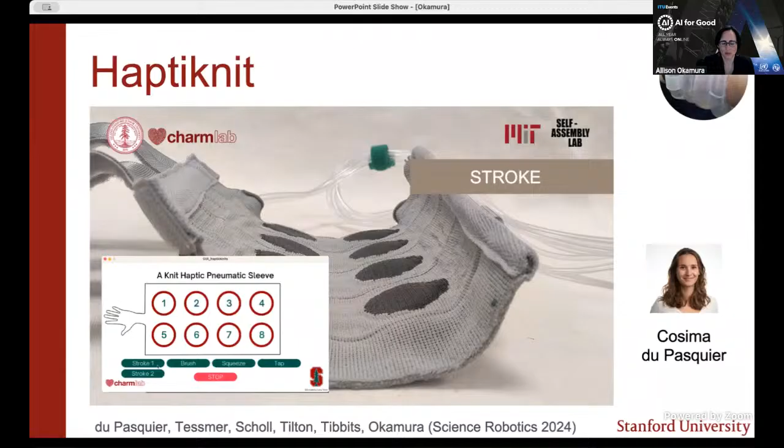So hopefully this has taken you on an interesting journey in soft robotics, all the way to soft haptics, ranging from medical applications to a number of applications in the outdoors, all the way to soft robots that allow human-machine interaction.